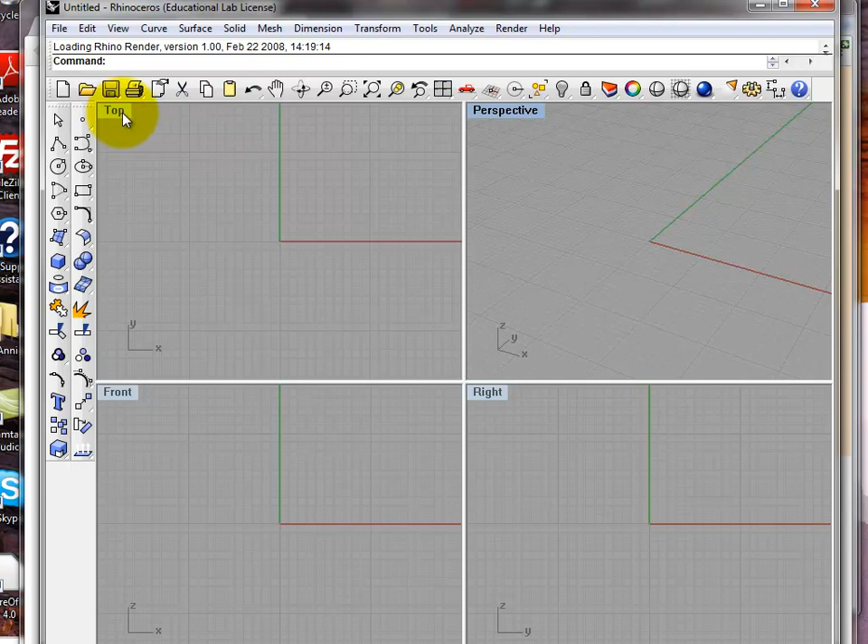Now you can open up your favourite CAD system. I'm just going to use Rhino here, exactly the same as AutoCAD. Double click this label here that says top, and that will fill up the window with just that viewport, because I don't need any other views. It's just a 2D drawing.

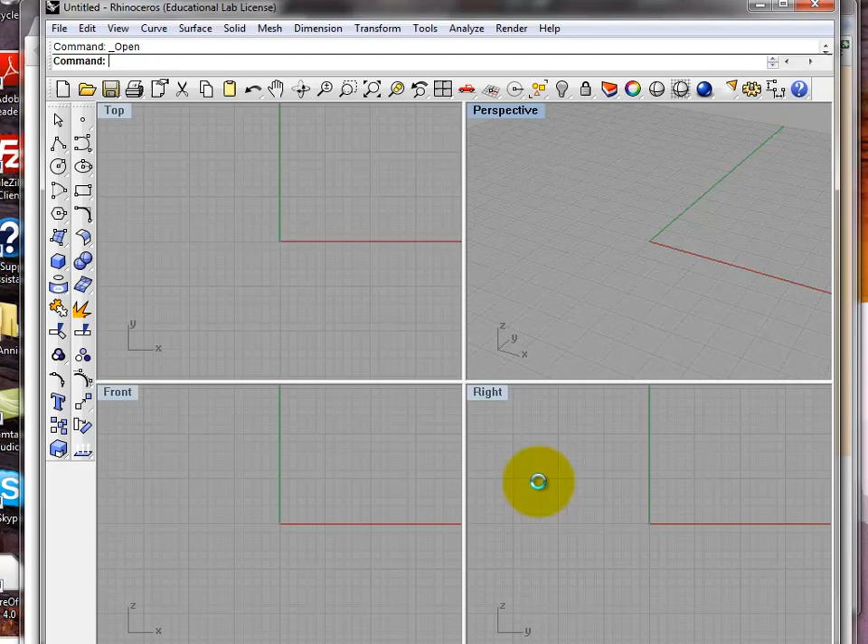Now we load in File, Open. File Open. Now it's not a Rhino file, it's a DXF file, an AutoCAD drawing exchange file. There it is, open it up. There's the gears. Double click that one to fill up the screen. And now we've got the two gears in the CAD system.

Now I'm going to draw the credit card sized backing board. First of all, just looking at these things at the bottom which you're going to have to use. We have snap, planar, turn that one off, object snap, sometimes useful, make sure that's off, off, off, and nothing's on.

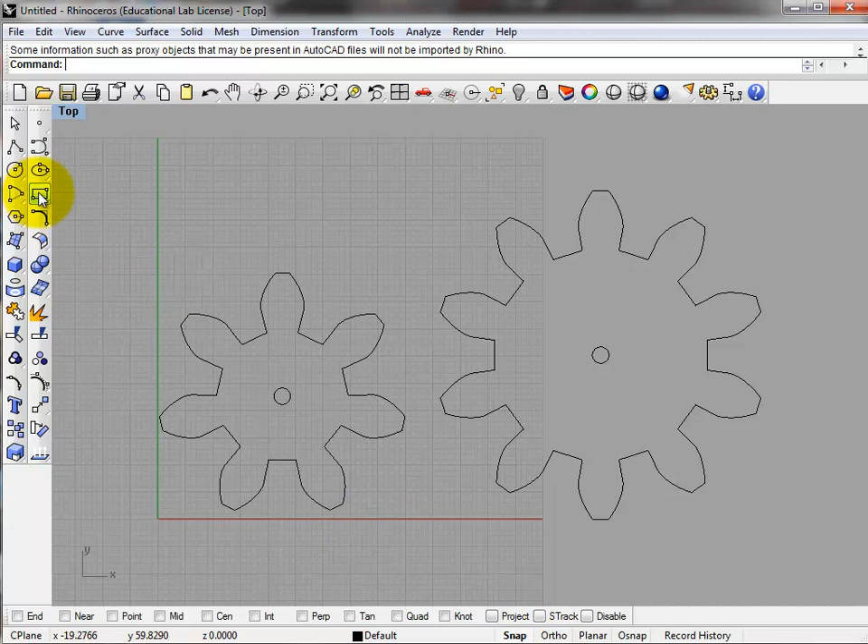Now let's draw the backing board, the dimensions of which are 85.6 by 54. So I select the rectangle. I can give it a rounded corner, but I'll just do that later.

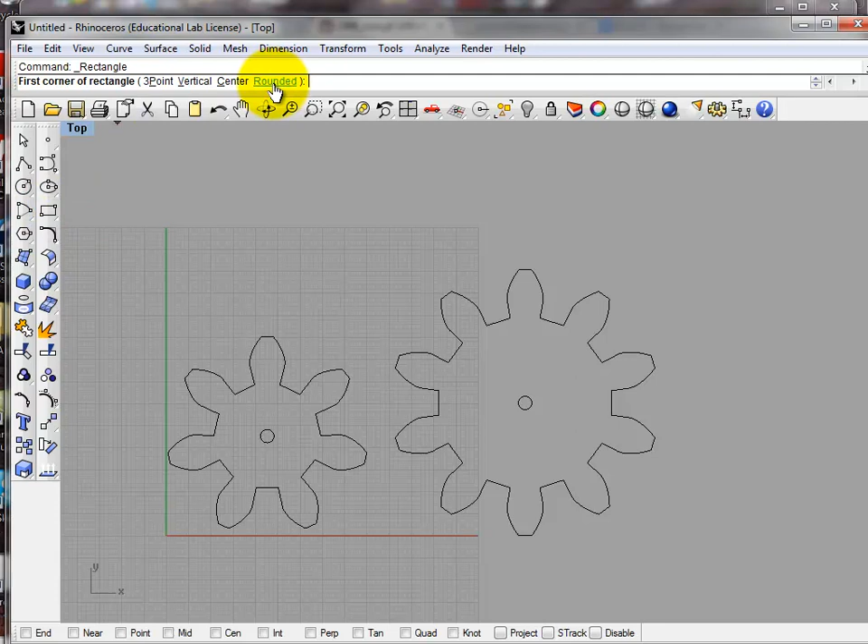Just place it in the first corner, can be 0, 0. The length again is 85.6 by 54.

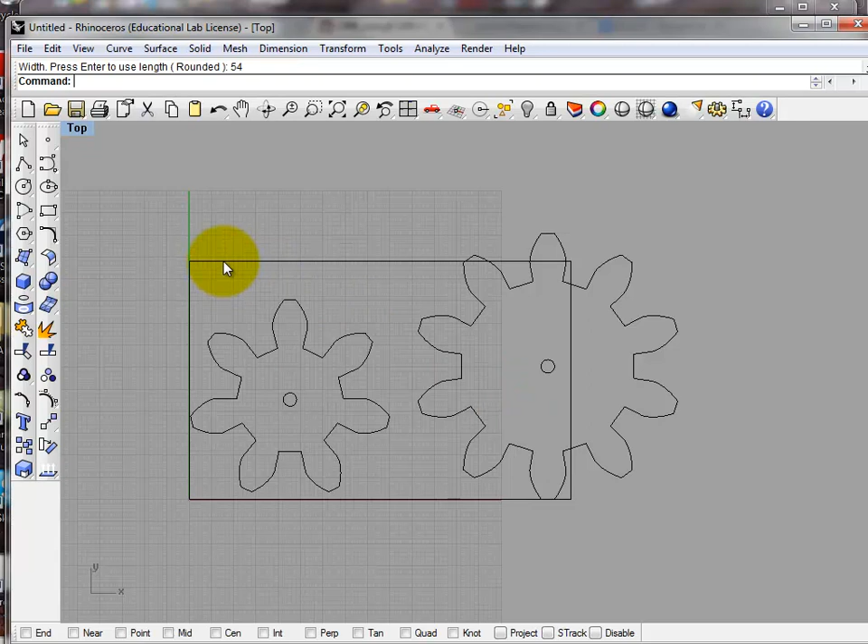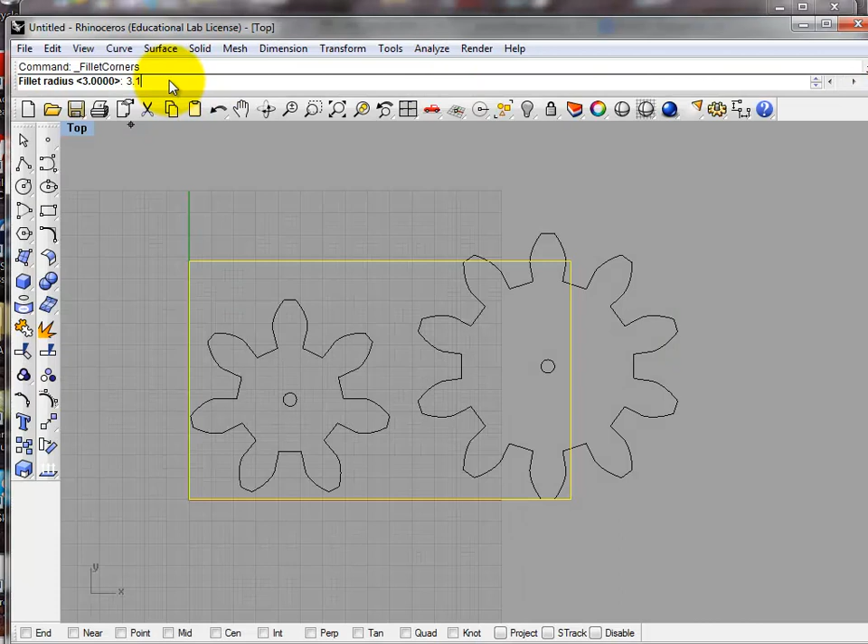Now that's the card. Now just to round off the corners, I can go curve, fillet corners, give it a radius of 3. Actually I think that should be 3.18. Change that to 3.18, and it's filleted the corners, so that's our backing board.

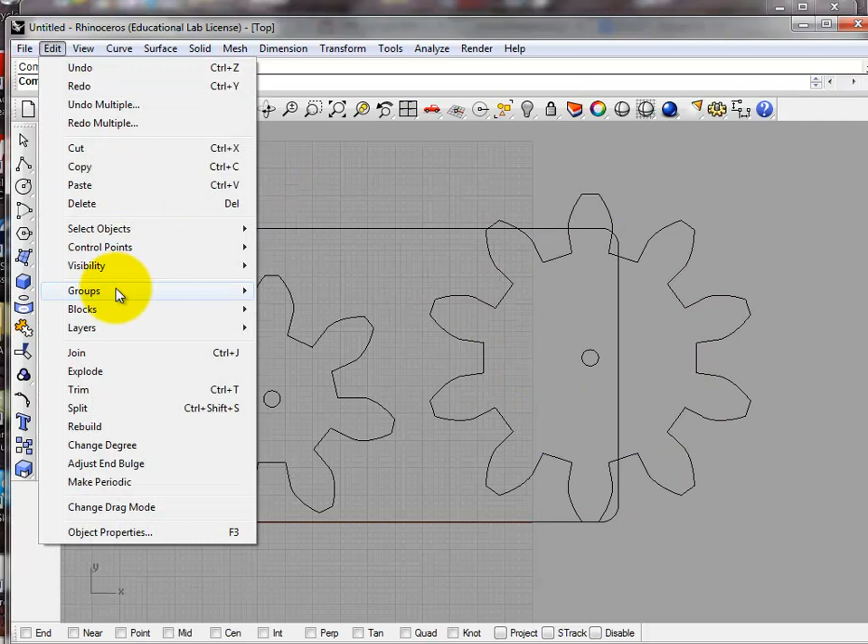Now we group the gear with the hole, so the two things become one object. Go edit, group that one and that one, and press enter, and they're grouped. So now it's one single item, and you can move it around, and the hole goes with it. I've done the other gear previously.

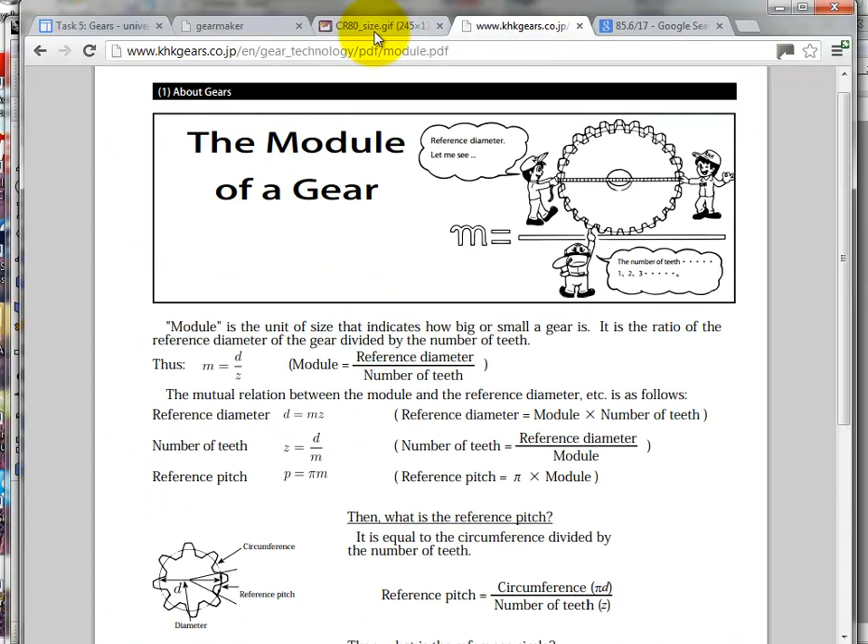So now we need to position these two so they fit on the backing board. The hole spacing, the distance between the centers of the two holes, has to be equal to the dimension given here, 42.755. So now we're going to try and position those two gears 42.755 millimeters apart. Let's draw a construction line on the midpoint.

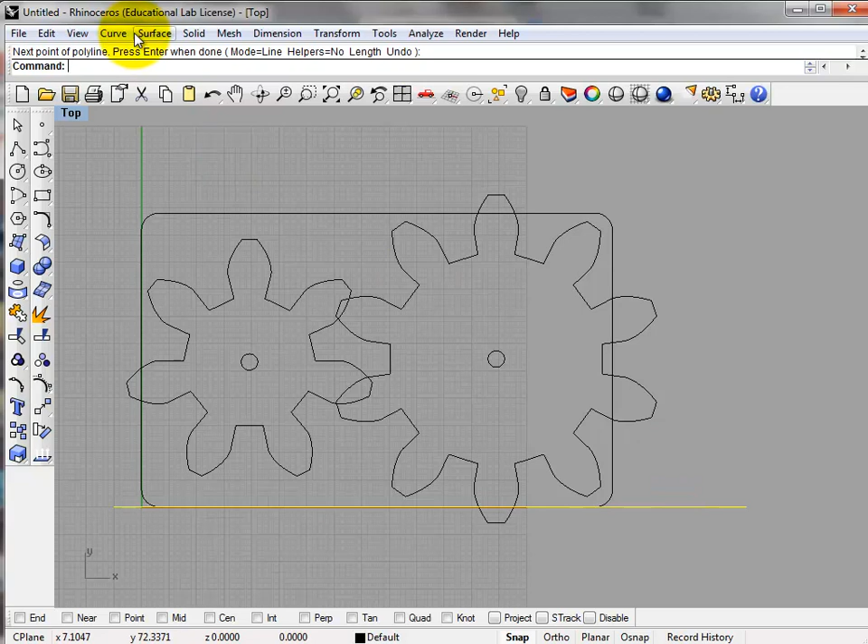So we'll start on one edge. There's a line. Now I'm going to offset it by half the height, which is half of 54, which is 27 millimeters. So curve, offset curve, type in 27, enter, and then press the mouse, and that's the center line. I'll delete the first line, I don't need it.

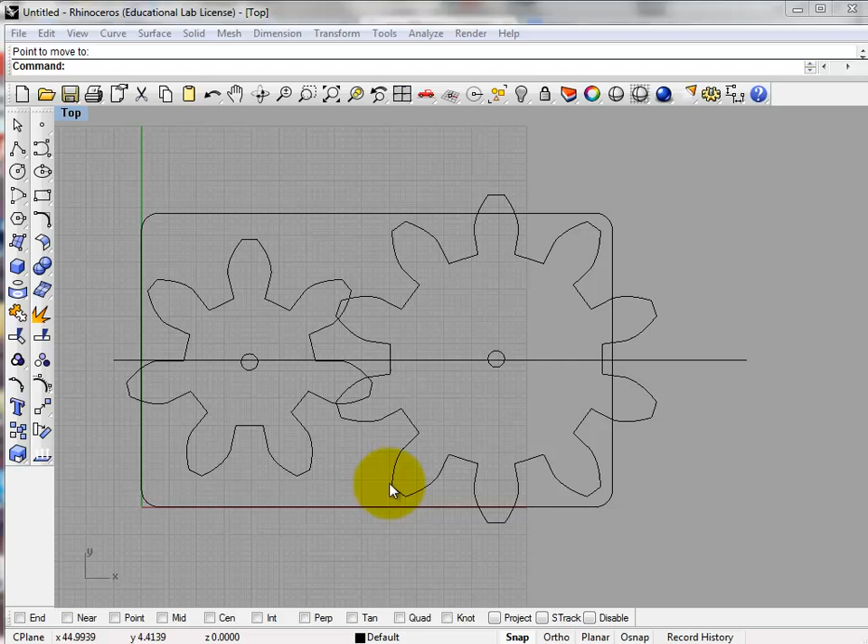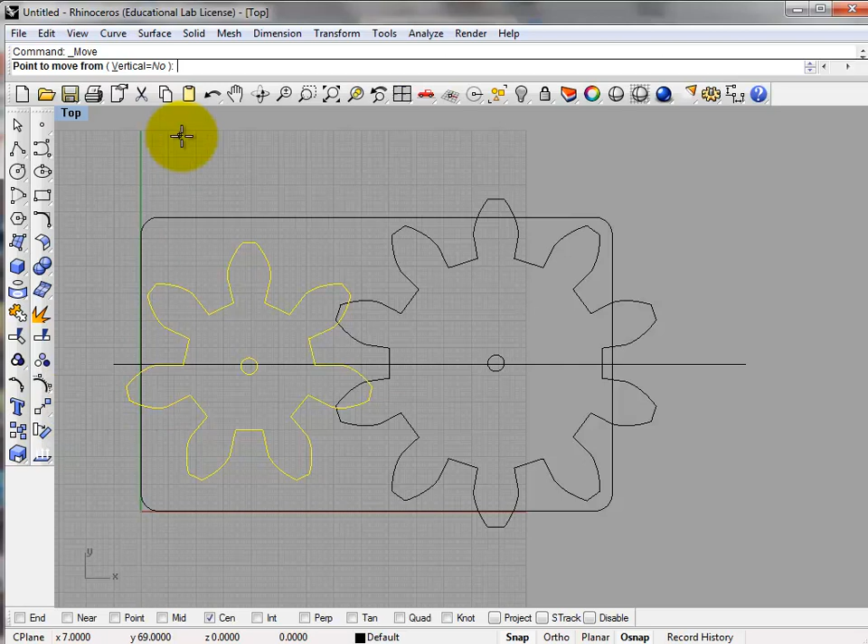So to put both these gears on the center line, they're not at the moment, they're slightly off. You click on the object snap center, so this highlights, the center is ticked, and then you click on the move button, and the point to move from will be the center, zooming in to there, and the same for the other one, move it from the center to there, so they're both on the center line.

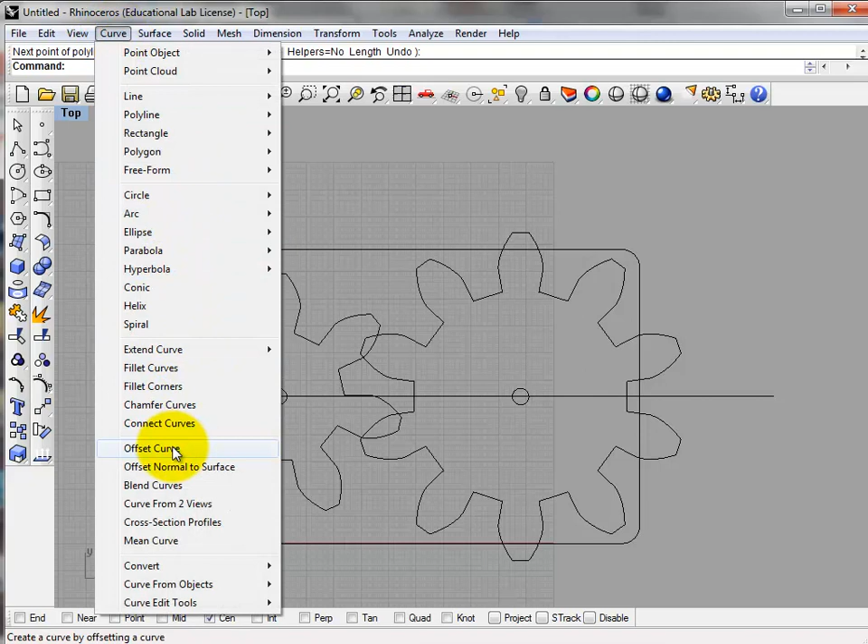And now we just need to get the distance between the centers correct. So I've just drawn a construction line through the center of gear 1, and now I'm going to offset it, curve, offset curve, by 42.755. And that's it. So now we need to move this gear into the intersection point of that.

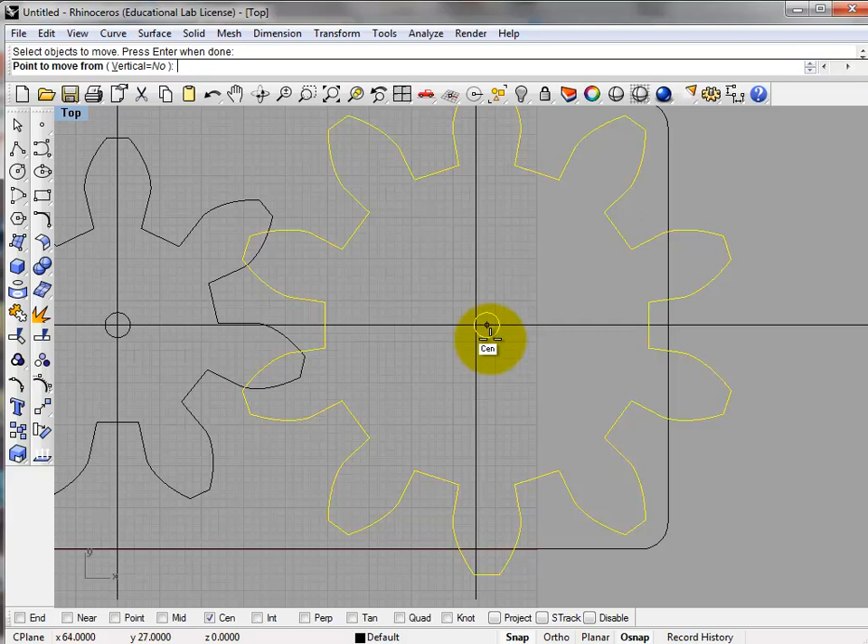So I'm going to move it from the center to the intersection. So I need int clicked on here, moving it to the intersection of those two lines. So now the gears are spaced exactly apart.

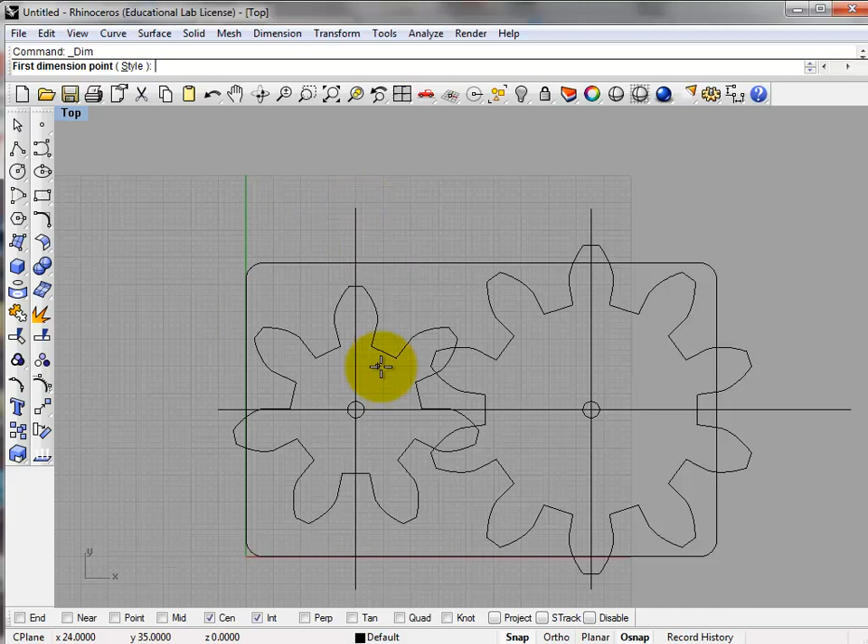And just to double check, you can always get a measurement. Let's go from intersection of that, intersection of that. Look at that, 42.76, which is good enough.

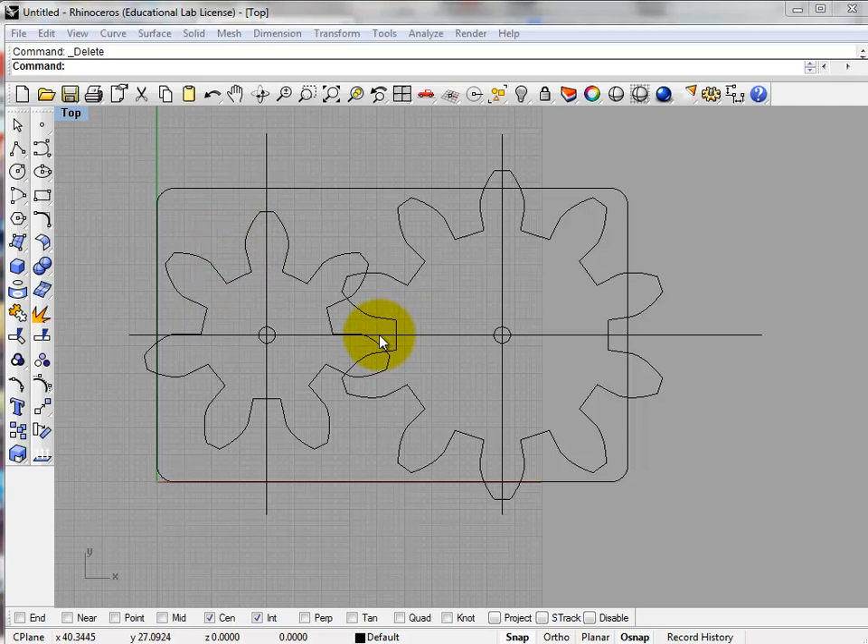And let's just trim these lines off. It might be quite useful to leave them on the backing board so we can see them. So just trim them, I think this is the trim. The cutting object can be that. Press enter, trim the bits that are going outside the boundary, and that's the job done.